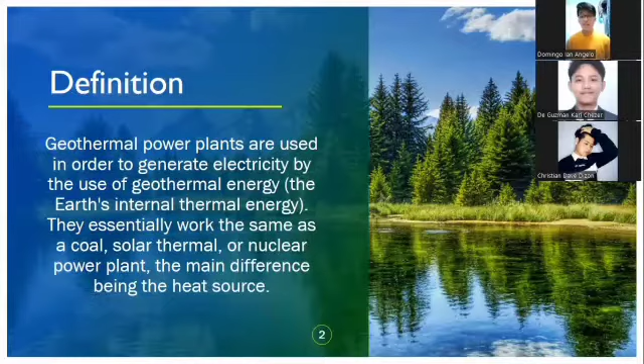Working principles: there is a natural source of power found below the surface of the Earth, which has been around for centuries. Underground, far below us, there are pools of water heated by magma or molten rocks. These pools of water make up our geothermal reservoir. Harnessing the power of the earth's temperature to power, heat, or cool our homes and businesses is the essence of geothermal power.

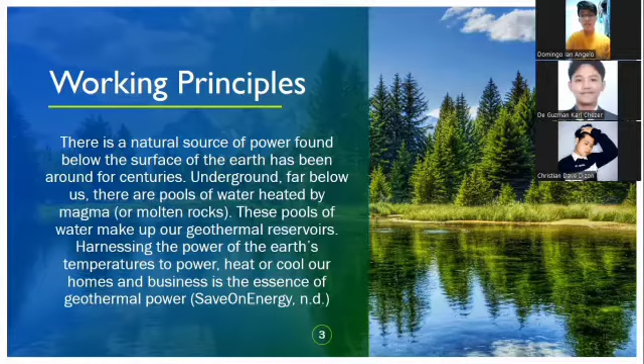Ranking of largest geothermal plants worldwide in 2018. First is the Geysers in the United States with 900 megawatts. Next is Larderello in Italy with 769 megawatts.

Next is Cerro Prieto in Mexico with 720 megawatts. And next is ours, the Philippines, Makban with 458 megawatts.

Next is Iceland's Hellisheiði with 400 megawatts. Next, back in the Philippines, Malitbog with 377 megawatts.

Next is the United States' Salton Sea with 340 megawatts. Next is the Philippines' Tiwi with 289 megawatts.

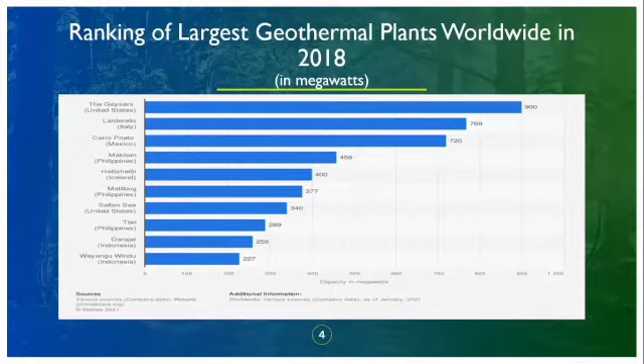So that's the largest geothermal plants worldwide in 2018.

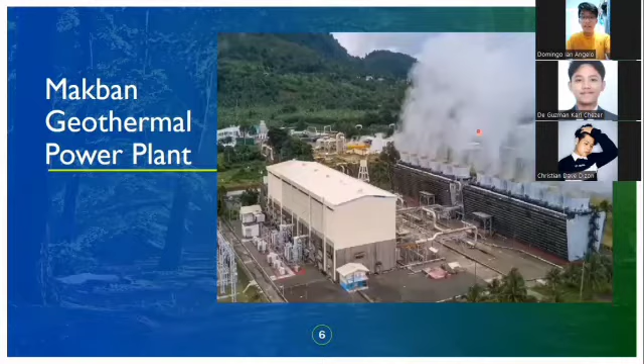What is the ideal location for geothermal plants? The most active geothermal resources are usually found along major tectonic plate boundaries, where most volcanoes are located. One of the most active geothermal areas in the world is called the Ring of Fire, which encircles the Pacific Ocean. That's why there are many geothermal plants here in the Philippines, because we're part of the Ring of Fire.

When magma comes near the Earth's surface, it heats ground water trapped in porous rock or water running along fractured rock surfaces and faults. Hydrothermal features have two common ingredients: water and heat. That's why it's called hydrothermal—water means hydro and heat means thermal.

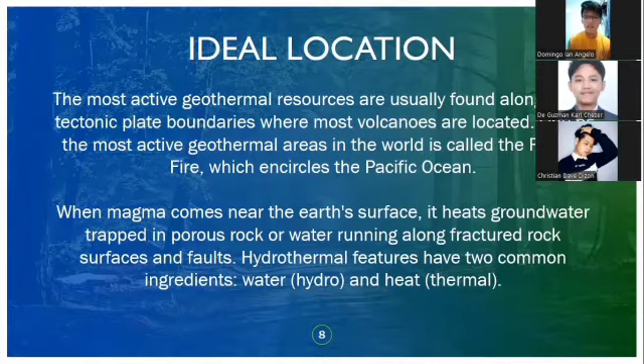Geologists use various methods to find geothermal reservoirs. Drilling a well and testing the temperature deep underground is the most reliable method for locating a geothermal reservoir. These reservoirs are deep underground and are largely undetectable above ground. Geothermal energy finds its way to the Earth's surface in three ways: volcanoes and fumaroles—holes in the earth where volcanic gases are released—hot springs, and geysers.

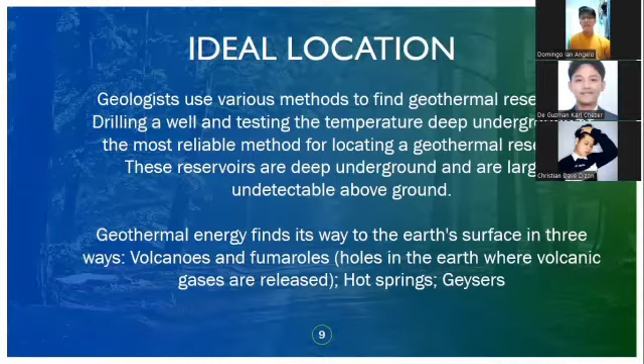Here is an example picture of volcanoes and fumaroles.

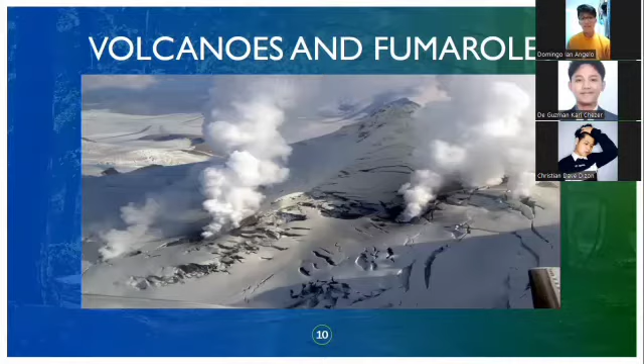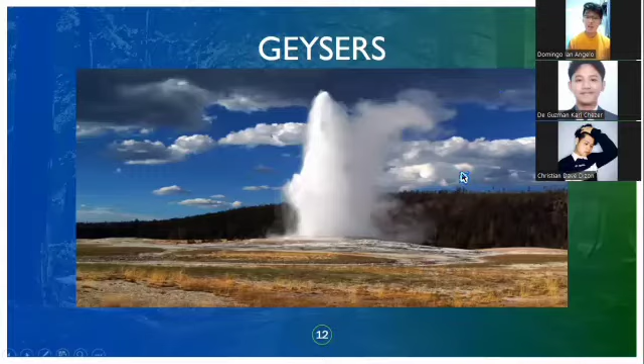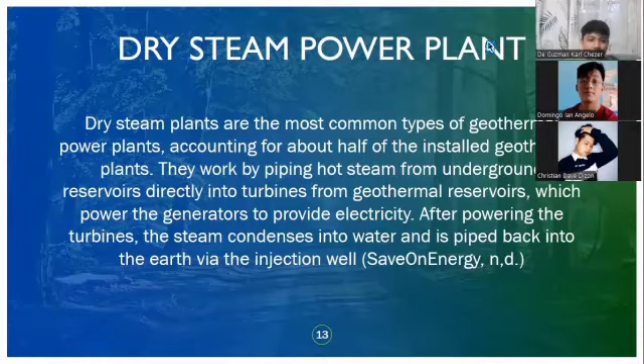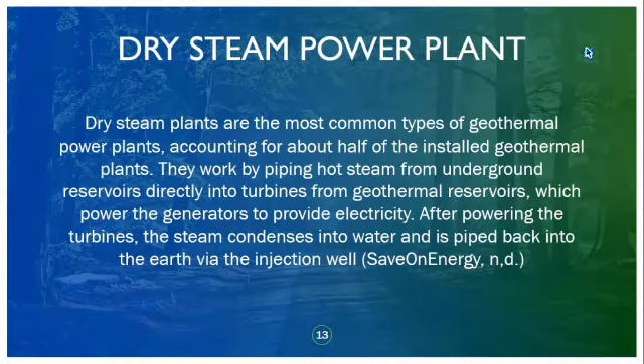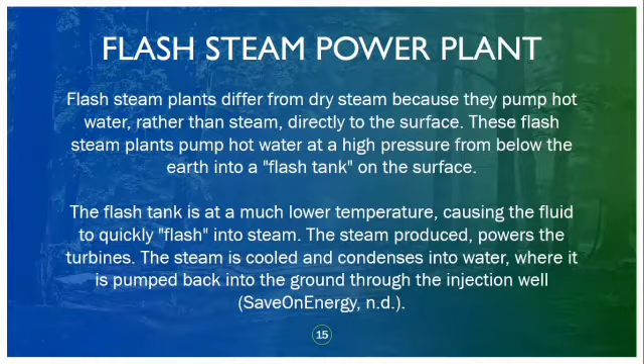Next, binary cycle power plant. In these binary cycle plants, the main difference is that the water or steam from below the earth never comes in direct contact with the turbines.

Instead, water from a geothermal reservoir is pumped through a heat exchanger where it hits a second liquid, like isobutane, which boils at a lower temperature than water. This second liquid is heated into steam, which powers the turbines that drive a generator. The hot water from the earth is recycled into the earth through the injection well, and the second liquid is recycled through the turbines and back into the heat exchanger where it can be used again.

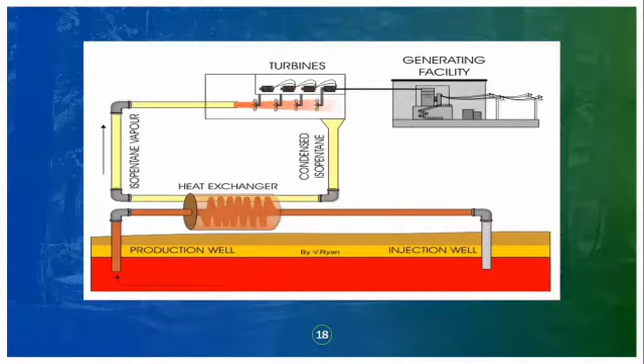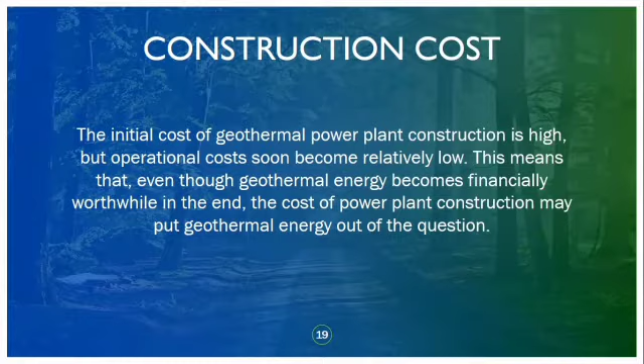Next, construction cost. The initial cost of geothermal power plant construction is high, but operational costs soon become relatively low. This means that even though geothermal energy becomes financially worthwhile in the end, the cost of power plant construction may put geothermal energy out of the question.

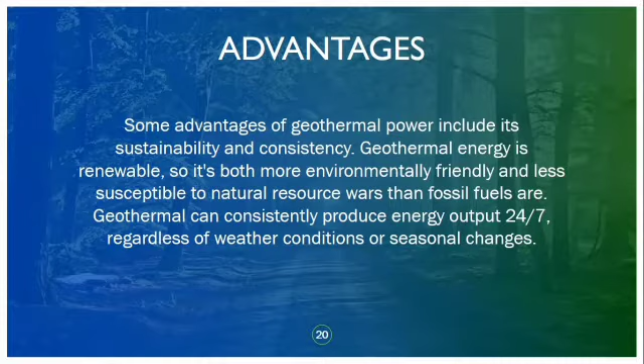Advantages. Some advantages of geothermal power include its sustainability and consistency. Geothermal energy is renewable, so it's both more environmentally friendly and less susceptible to natural resource wars than fossil fuels are. Geothermal can consistently produce energy output 24/7 regardless of weather conditions or seasonal changes.

The disadvantages of geothermal power are the geographic limitations and high cost associated with power plant construction. This needs to be built over regions with underground reservoirs of hot steam or water. Though it's technically possible to engineer enhanced geothermal systems in unsuitable environments, it's highly impractical to do so.

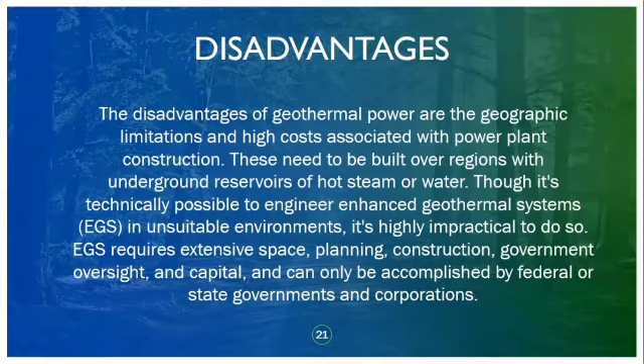EGS requires extensive space, planning, construction, government oversight, and capital, and can only be accomplished by federal or state governments and corporations. Next, hydroelectric power plant or hydropower.

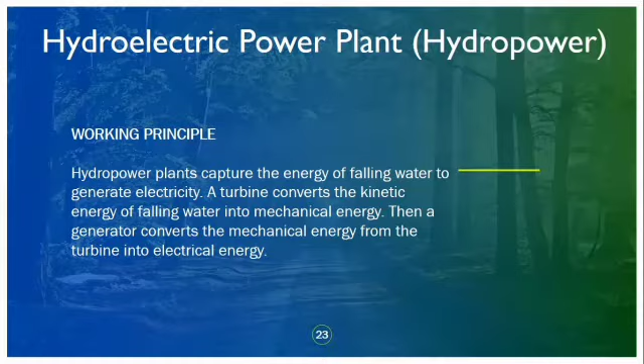The working principle of hydroelectric power plants: hydropower plants capture the energy of falling water to generate electricity. A turbine converts the kinetic energy of falling water into mechanical energy. Then a generator converts the mechanical energy from the turbine into electrical energy.

Largest hydropower plant in the Philippines: the Magat Dam. The Magat Hydroelectric Power Plant is one of the largest hydro facilities in Luzon, with a maximum output of 380 megawatts. Construction of the dam started in 1975 and was completed in 1982. It is one of the largest dams in the Philippines.

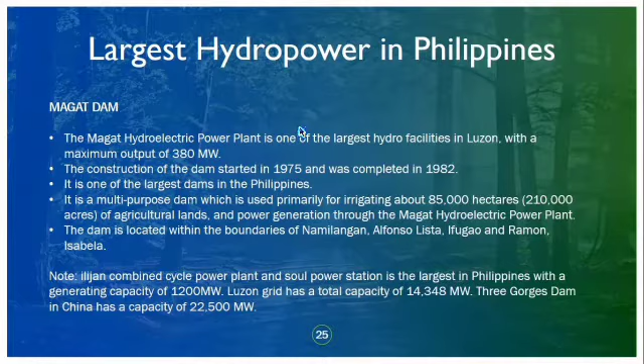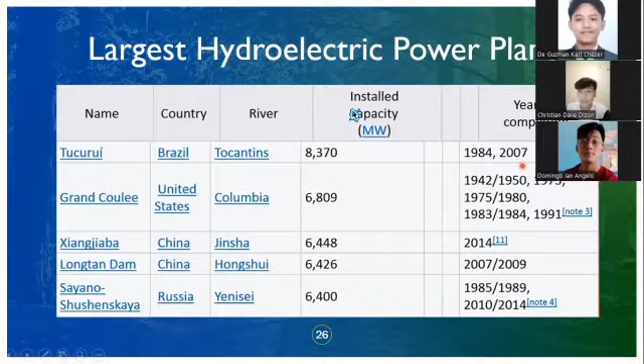Largest hydroelectric power plants: first is Tucuruí in Brazil, on the river Tocantins, with 8,370 megawatts. Years of completion were 1984 to 2007.

Next is Grand Coulee in the United States, on the Columbia River, with 6,809 megawatts. Years of completion were 1942, 1950, 1973, 1975, 1980, 1983, 1984, and 1991.

Next is Xiangjiaba in China, on the Jinsha River, with 6,448 megawatts. Years of completion was 2014.

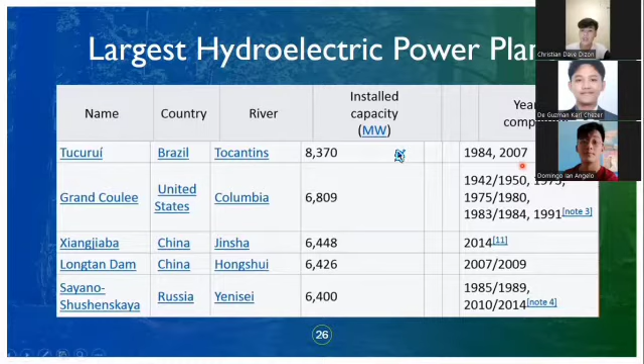Next is the Longtan Dam, also in China, on the Hongshui River, with 6,426 megawatts. Years of completion were 2007 to 2009.

Next is Sayano-Shushenskaya in Russia, on the Yenisei River, with 6,400 megawatts. Years of completion were 1985, 1989, and 2010 to 2014.

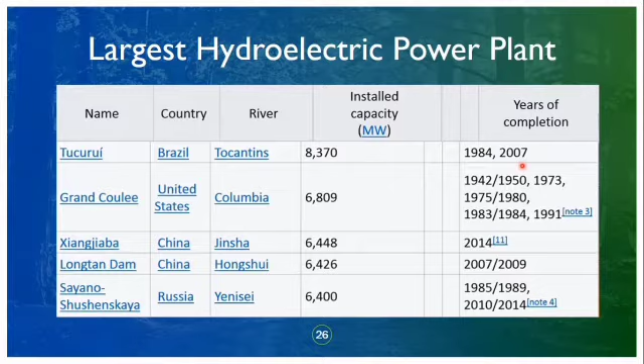Next, hydroelectric power plant, or hydropower: how it operates. Dam. Most hydropower plants rely on a dam that holds back water, creating a large reservoir.

Often, this reservoir is used as a recreational lake, such as Lake Roosevelt at the Grand Coulee Dam in Washington State. Intake: gates on the dam open, and gravity pulls the water through the penstock, a pipeline that leads to the turbine. Water builds up pressure as it flows through this pipe.

Turbine: the water strikes and turns the large blades of a turbine, which is attached to a generator above it by way of a shaft.

Generators: as the turbine blades turn, so do a series of magnets inside the generator. Giant magnets rotate past copper coils, producing alternating current, or AC, by moving electrons.

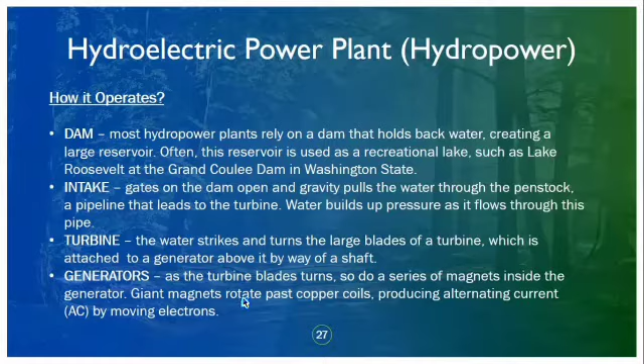Next, transformer: the transformers inside the powerhouse take the AC and convert it to higher voltage current. Next is power lines: out of every power plant come 4 wires — the 3 phases of power being produced simultaneously, plus a neutral or ground common to all 3.

Last is outflow: used water is carried through pipelines called tailraces and re-enters the river downstream.

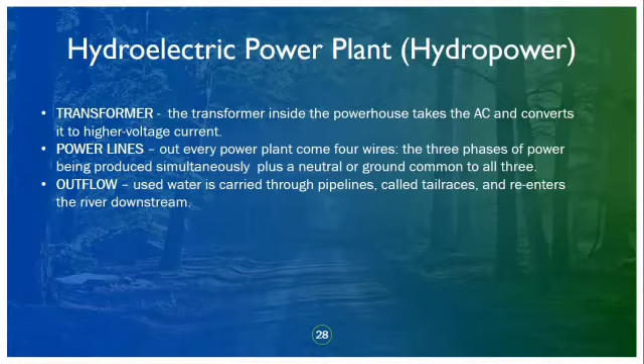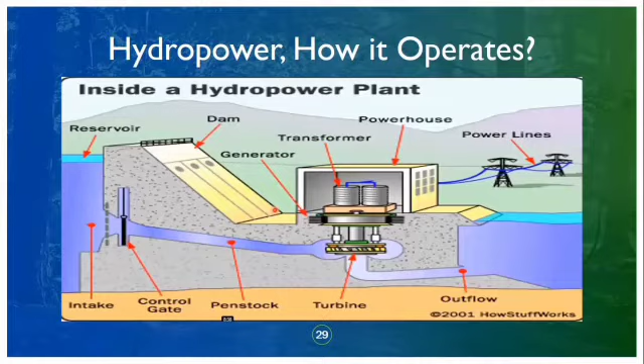Tapos pag kailangan naman na ng electricity, gagamitan na siya ng control gate. Nadadaan sa may penstock, yung pinakatubo niya papunta sa turbine. Tapos pag umikot yung turbine na yon, pupunta na siya sa generator. Then after sa generator, pupunta na siya sa transformer. Tapos yung transformer na yun, papunta na sa substation, yung mga papunta sa consumer.

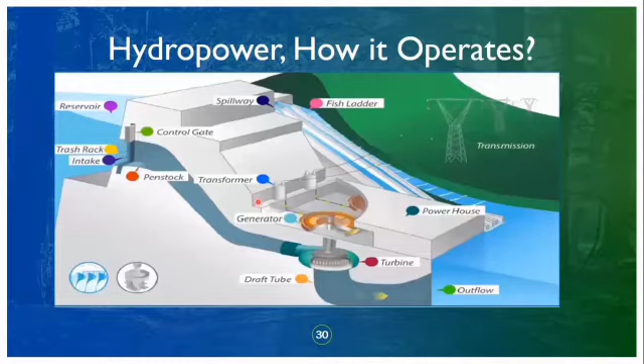Construction. The construction of this dam is difficult and labor intensive.

Before construction begins, water is diverted or prevented from moving through the construction site. After the water is diverted, the foundation area is cleaned, excavated, and the rock or sediments that will act as a foundation are repaired and deemed solid. This is done to ensure the rock or sediments won't shift or fall as a result of the load of the dam and reservoir.

Support known as rock bolts and netting may be used to prevent rocks from falling into the dam. Forms are then built along the edges of the dam. Rebar is placed inside and concrete is pumped in. This is done in sections. The concrete is poured bit by bit in a block formation.

Once enough of the dam is built, the reservoir is allowed to fill in a highly controlled manner. The dam is monitored during this process. Other structures that make it operational are then added.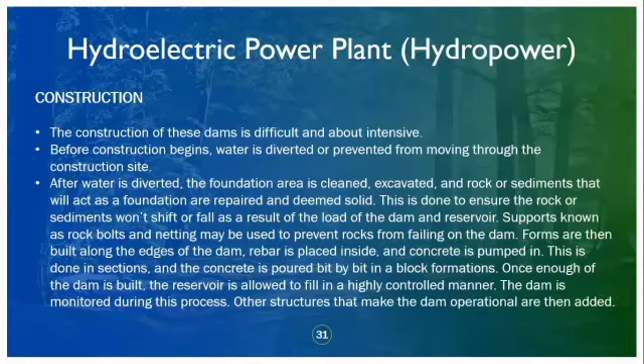Hydropower dam design. Ito yung mga design ng solid gravity dam, arch dam, Buttress dam.

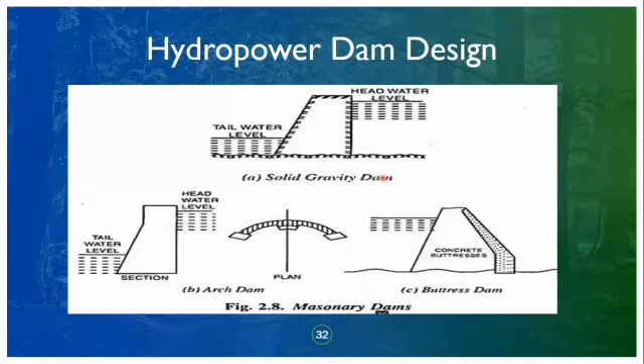At ito rin yung isang example ng design ng dam.

Main factors that determine the dam power output. The amount of electricity a hydropower plant produces depends on two factors. First is how far the water falls. The farther the water falls, the more power it has.

Generally, the distance that the water falls depends on the size of the dam. The higher the dam, the farther the water falls, and the more power is directly proportional to the distance it falls. In other words, water falling twice as far has twice as much energy.

Next is yung amount of water falling. More water falling through the turbine will produce more power. The amount of water available depends on the amount of water falling down the river. Bigger rivers have more flowing water that can produce more energy. Power is also directly proportional to river flow. A river with twice the amount of flowing water as another river can produce twice as much energy.

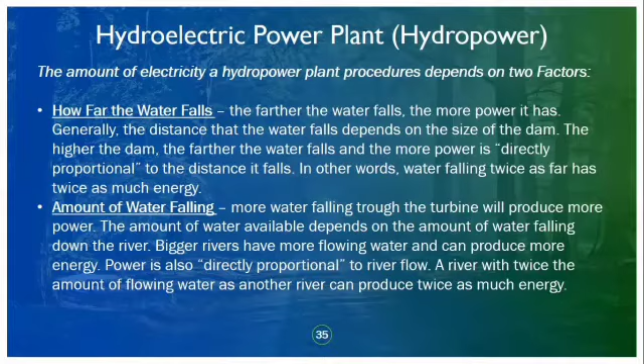Tallest dam. Currently, the tallest dam in the world is Nurek Dam on the Vakhsh River in Tajikistan. It is 984 feet or 300 meters tall. Hoover Dam is 716.4 feet or 221.3 meters tall.

Today, Hoover Dam still ranks in the top 20 tallest dams in the world, but only in the concrete, gravity, and arch categories.